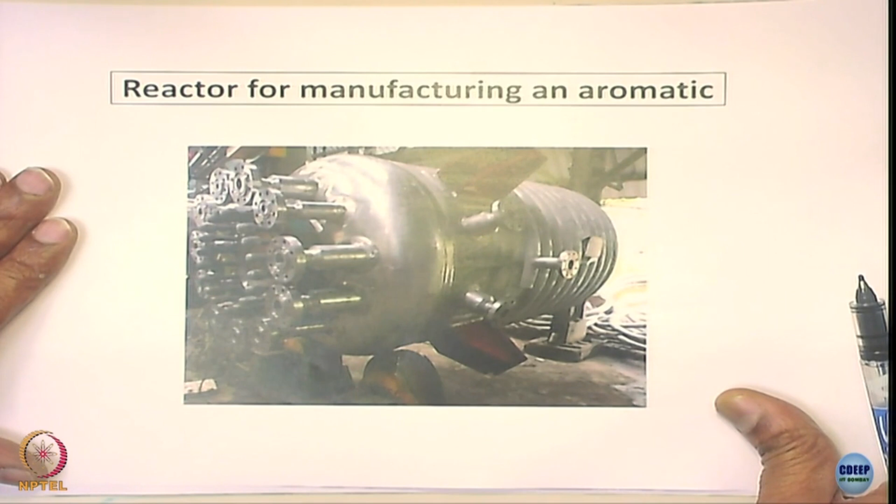And I do not think, when you have hydrogen, you really would like to take risk of that. And if I look at it, look at the inner walls of the reactor.

Normally we do NDT, right? NDT is one, very versatile NDT is dye penetrant test. Some of you are aware of it. You apply a dye on the surface and you wipe them out, and you also add another eluant to the surface, and so the dye comes to the surface, and wherever there is a crack, the dye penetrates and comes back out. So you will be able to see the subsurface cracks, even surface cracks, using the dye penetrant test.

When you take a cross section of that, you see how the cross section looks like. I hope you will be able to see very fine cracks starting from the surface and moving inward. It is a very thick vessel of 50 millimeter thickness, 304L stainless steel, and you find that it just failed in 4 months.

If you look at little bit more in detail at higher magnification, you will find the cracks are microscopic in nature, and the microscopic cracks turned into a macroscopic failure, and you guys now are reasonably familiar with metallurgy. You see that these cracks are all branching now, and some of them are called transgranular cracks. We will come back to this soon. So 4 months time and the reactor started failing.

This is a heat exchanger, this is a kind of schematic of that, and it is called an air condenser. You want to dry the air, especially when, see what happens, in industry every bit of heat is important.

You create heat, you just do not want to let it out. You take the heat out from that. Heat is essentially energy. So the air comes out of the reaction process, you need to remove the heat because it costs money, and this is the condenser, air condenser. It takes the heat and it is called a

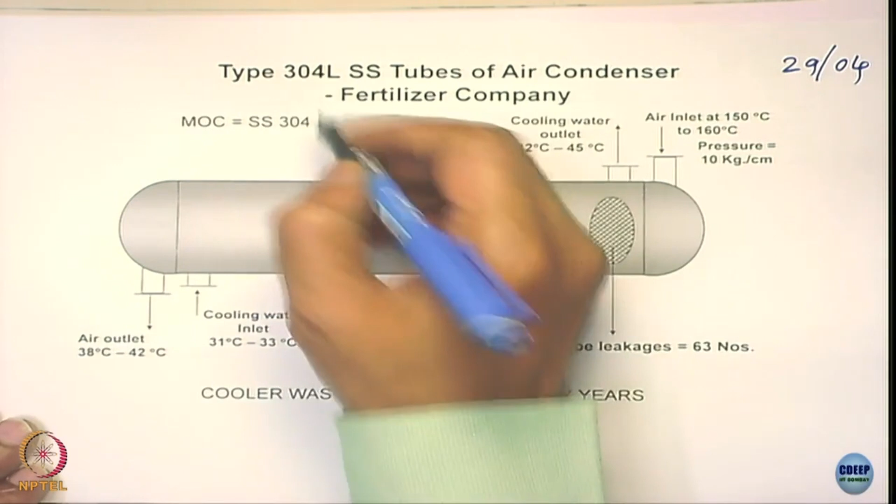cooling water system. So what you do here is that you can see there is an inlet here, it goes inside this outlet here, and it is a horizontal heat exchanger, made up of 304L stainless steel. The air inlet temperature is about 150 to 160 degrees Celsius at a pressure of

10 kg per centimeter square, and you have cooling water that enters here and comes out, air enters here and then it comes out here. It is a counter current process, that's what happens.

The material used was 304L stainless steel, it is a fertilizer company, and the cooler was in operation for 6 to 7 years, not longer. And the tubes which are inside, 63 of them started leaking. That was a problem, so they are all premature failures.

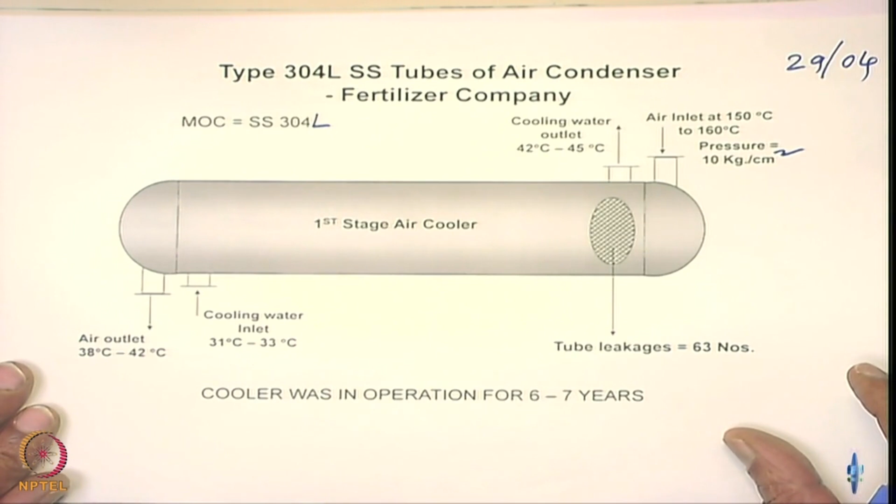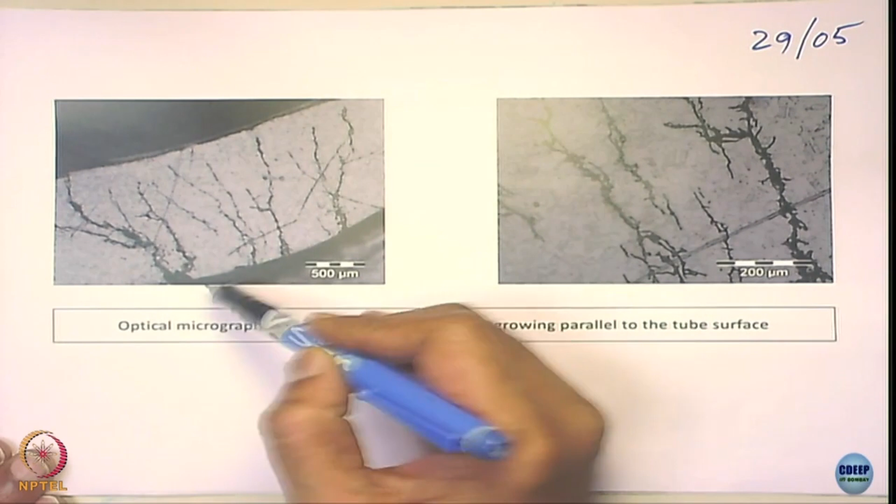You just take these tubes and see the tubes in a microscope. This is the cross section of the tube. You see here the crack started from the external side where the water went through. So wherever the surface is covered with water, you start cracking.

This is called cooling water. This is not distilled water. It is of course not pure water, not like your DM water.

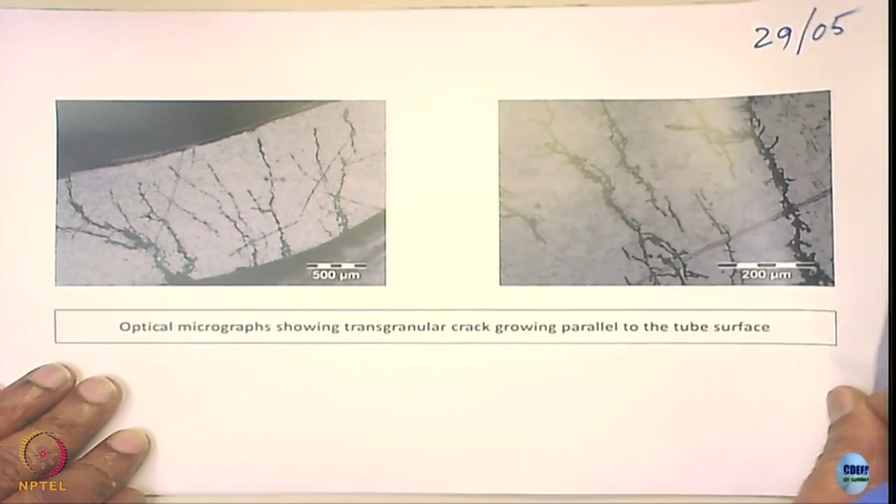Again, you see a kind of branching of cracks. This is one of the characteristics of stress corrosion cracking. If you do a tensile testing, or if mechanical loading is the cause of failure, you only see one crack. The cracks are not branching at all. The crack morphologies we will discuss shortly. And this is also some kind of transgranular cracking taking place. Look at this in a scanning electron microscope in detail.

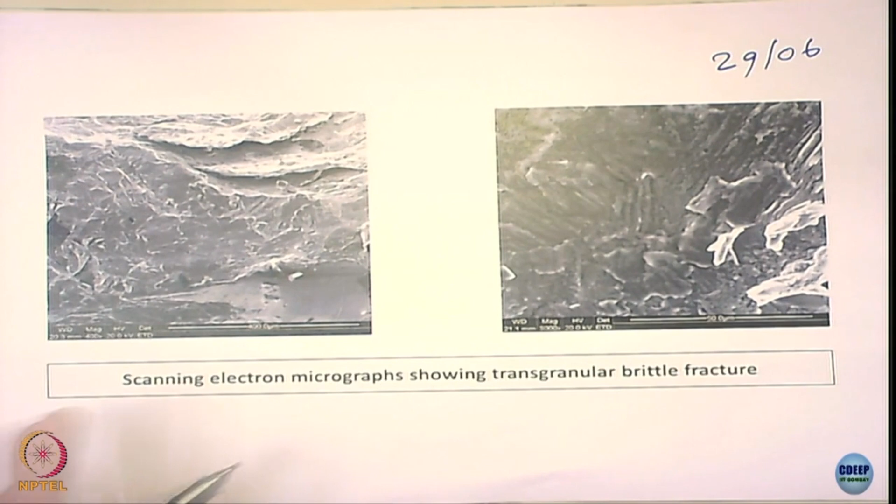See the surface, it is quite a brittle surface, right, it's a brittle surface. Those with a metallurgy background will appreciate and understand what brittle fracture is. And those who are not from a metallurgy background, I want to show how a normal fracture should look like.

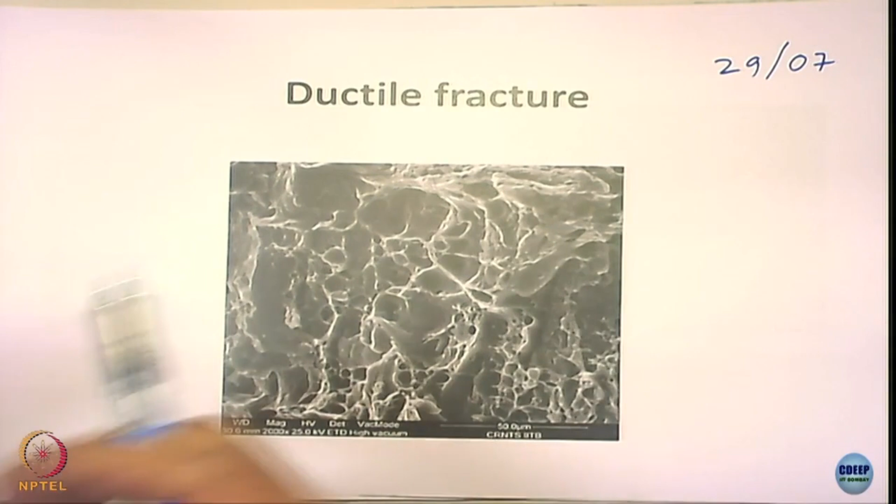Under the microscope, you see this here. This is a material that failed in air, in the absence of environment. It is a tensile failure, and hope you can see this. It is called a fibrous failure, a dimple failure and dimple fracture. You can see the fibers, the metal has nicely elongated, they just flowed nicely, right. So this is a kind of ductile fracture you see when you have simple failure in air.

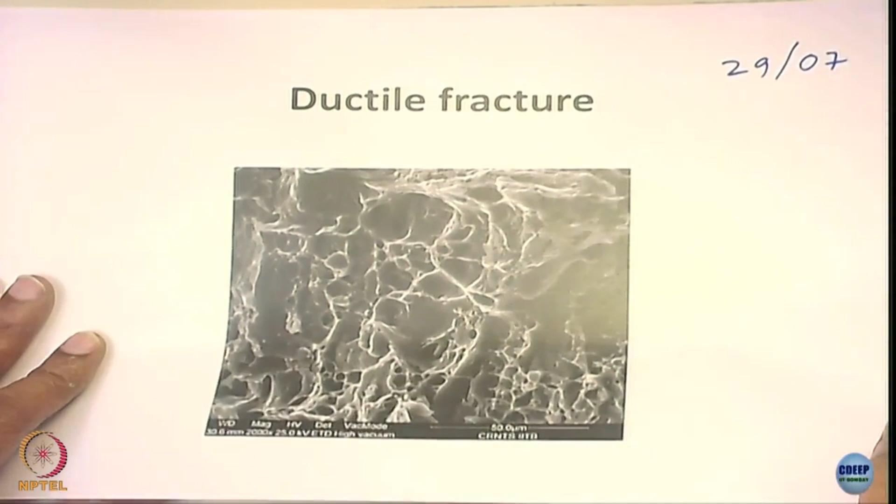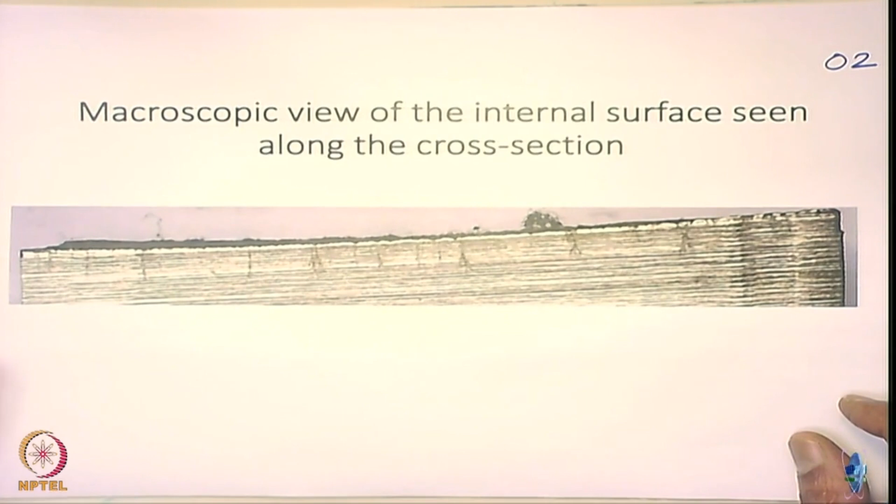The problem in stress corrosion cracking is that it can cause premature failure, and it is not going to cause too much corrosion. See here now the surface, this is the surface internally, and you do not really see much corrosion at all. I hope you were able to see this clearly. Wherever there is a crack, and subsequent places, you are not seeing any corrosion. So visually they are not undergoing severe uniform corrosion at all, and so this corrosion is very localized and is called stress corrosion cracking.

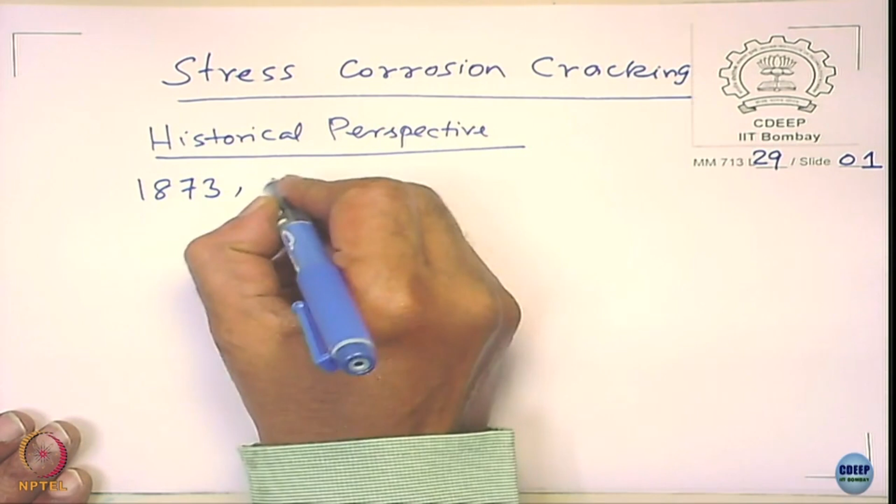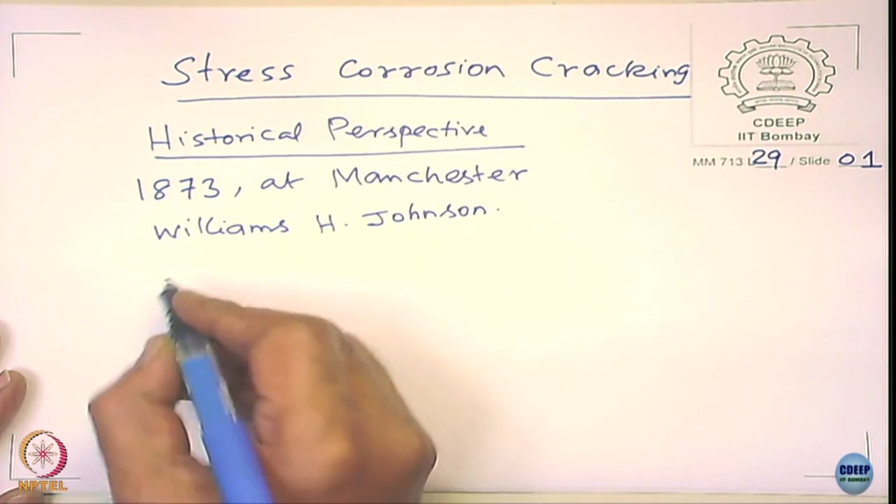Actually, in the year 1873 at Manchester, a guy called Williams H. Johnson did a very interesting, curious experiment. What he did was he took steel, and then he dipped it in hydrochloric acid, and also in sulfuric acid, both the acids. He just dipped it, and then he carried out a tensile test. He found ductility reduced significantly.

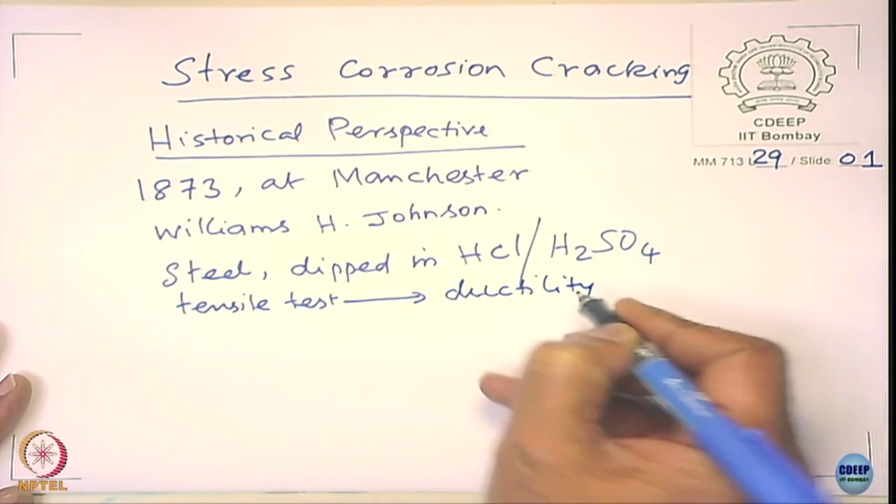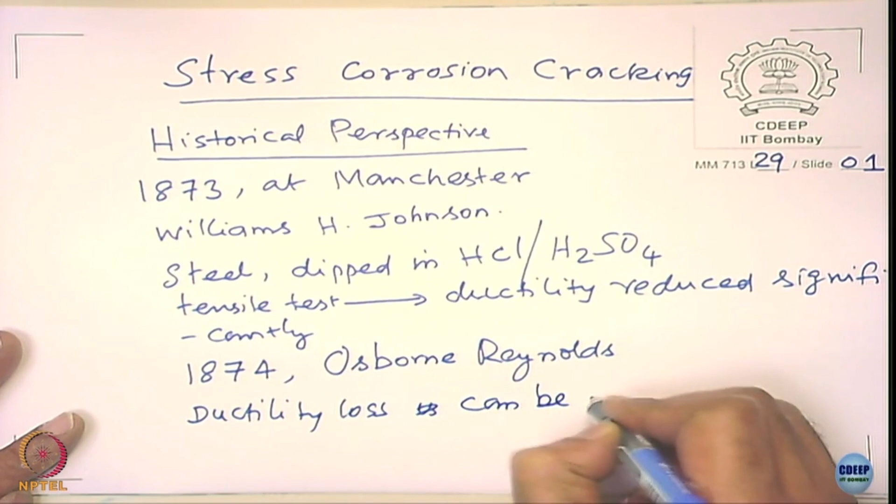In the year 1874, another interesting person, Osborne Reynolds, did another interesting experiment. He found that ductility loss can be reversible. You expose it to the environment and do tensile testing, and you see there is a loss in ductility, but if you just leave it for quite some time in air, he says that if you do a test after a few months, a major part of the ductility loss can be recovered. That was a very interesting experiment that was done.

Now subsequently, in the year 1886, the guy called Roberts-Austen took 22 karat gold and drew it into a wire. Then he exposed it to ferric chloride. The wire got cracked. Probably this is the first such observation which talks about so-called stress corrosion cracking.

The earlier observations pertain to hydrogen damage, hydrogen embrittlement, which we will talk about later. So these were all academic experiments, more academic, and the importance of such loss in mechanical properties -- you see what is here, there is a loss in ductility taking place -- they did not realize it then; they started realizing it in the early 20th century.

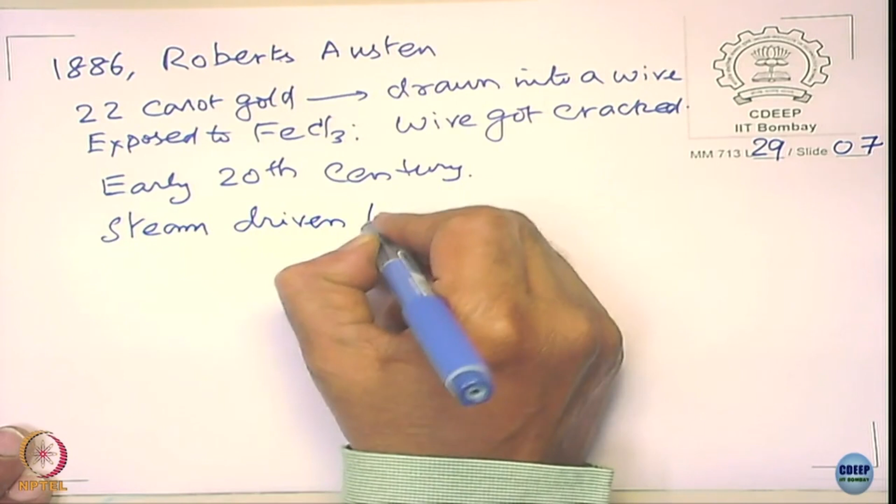There was a time when the industrial revolution was taking place, right? A lot of technologies were developed, and it so happened the invention of steam driven locomotives -- the steam driven locomotives first saw the problem of stress corrosion cracking, how severe it can be. Now it is simple: water and you generate steam, and that is used to drive the locomotives. Now the same steam is used to generate electric power, right? Now people have used electric power.

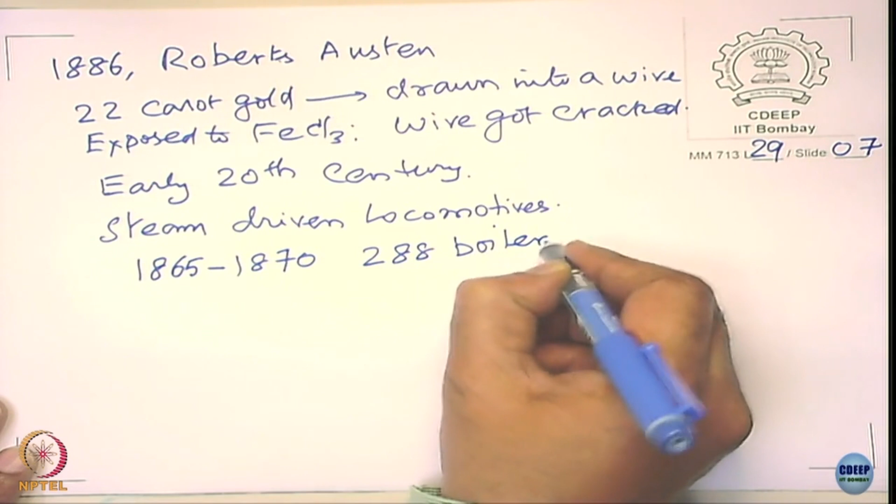Now this is a problem, because this is very mind-boggling: from 1865 to 1870, 288 boilers exploded in UK, and in 1867 to 1868, we had 441 boilers exploded in USA.

It was really kind of... you see the consequence of an explosion, right? The pressure vessel actually, and the steam at that temperature and pressure, caused a lot of casualties. How did it happen?

The steam boilers were made up of steel, and they were fabricated using rivets. You put a sheet, then a rivet, and then you cold compress it. There will be more stresses, lots of residual stresses in the system.

And when you use water for the boilers, the pH is increased, otherwise the steel will corrode. The pH used to be around 10 or so. When you boil the water and take the steam out, what happens to whatever remains in the boiler? How do you make the pH of the water higher? You add sodium hydroxide to increase the pH to let's say 10, and you boil and evaporate.

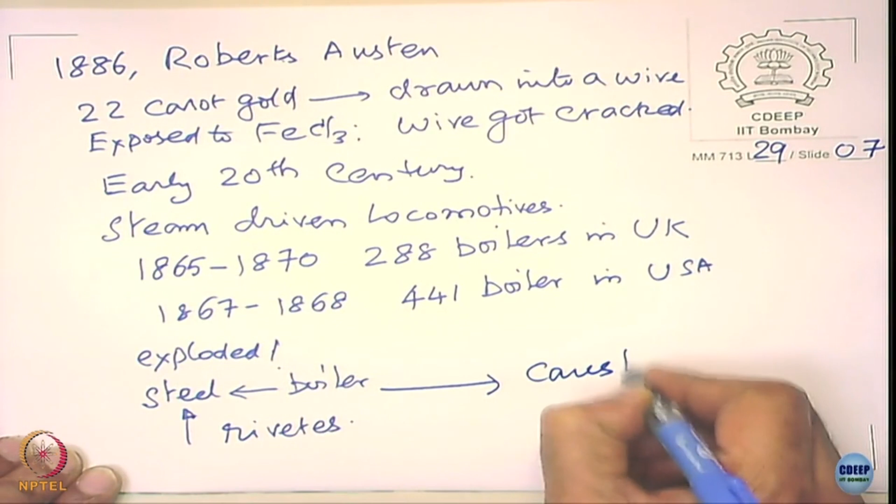With time, the sodium hydroxide concentration increases and leads to cracking. So the name emerged, caustic embrittlement. We now know it is a simple mechanism of stress corrosion cracking, but those days they called it caustic embrittlement because wherever the caustic accumulated... see, when you have a sheet joined like this and you put a rivet here, in this gap there will be accumulation of sodium hydroxide, which starts giving rise to cracks.

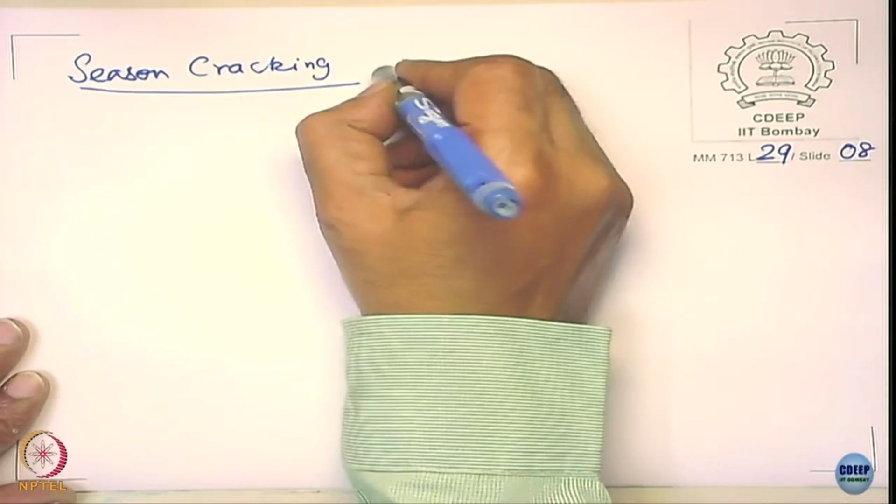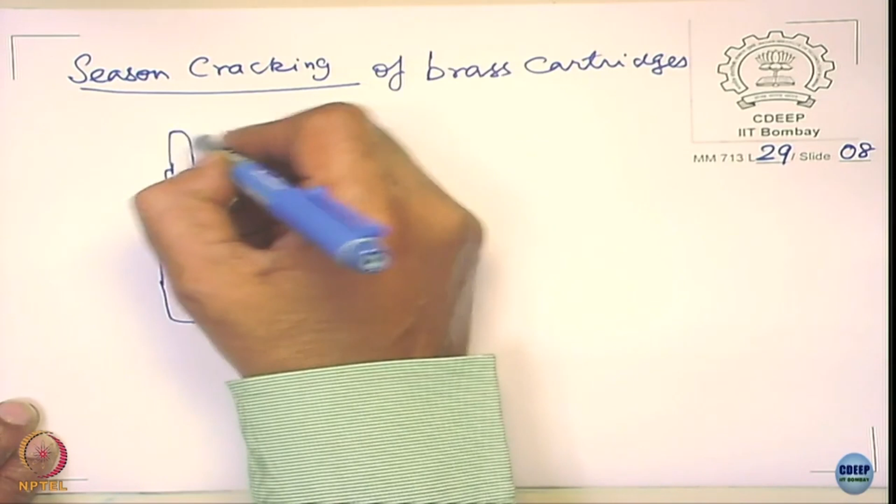Historically, there is one more incident that also brought the attention of people: season cracking of brass cartridges. It's a bullet, and you mount it, crimping here. This part is hard, maybe steel or something like that, and this is made up of brass. What happened was the cartridges started cracking during the winter time.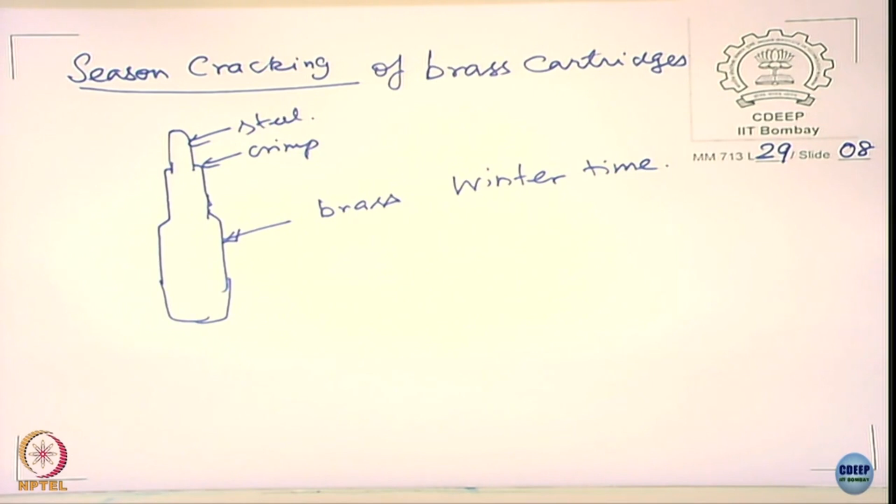This was traced to India first, because the British found that these cartridges failed during winter and monsoon time. During winter and monsoon time, what happens to organics? Suppose you have organics, they decompose and generate ammonia. The ammonia causes cracking of brasses.

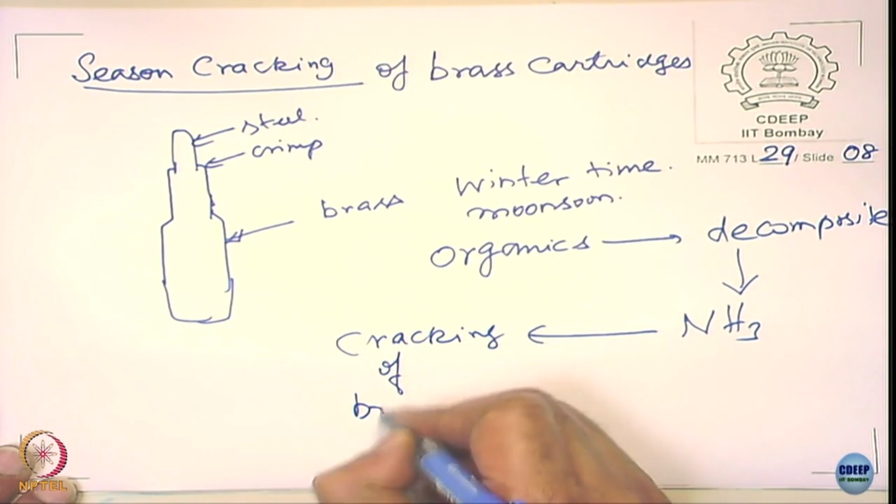So these are the names given to stress corrosion cracking because they are associated with certain events, but they all in fact come under stress corrosion cracking of metals. Why should you worry about stress corrosion cracking? Why bother about it?

We have, I think, some mechanical engineers here with that background. I give a material and ask you to use it to design some structure, maybe a pipeline or a foot-over bridge, whatever. So what input parameters do you take to design the structures?

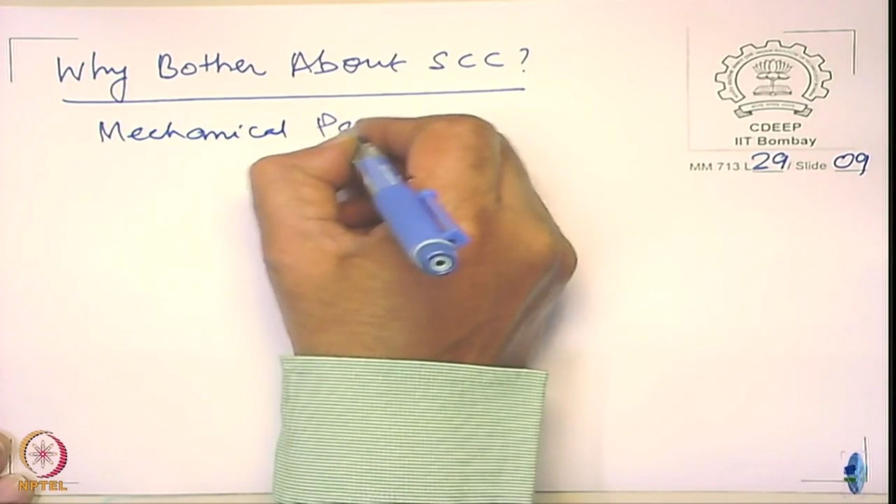These parameters - of course you can also look at the toughness, the K1C value. So you look at the yield strength of the material, ultimate tensile strength, the elongation, and the K1C value, which is called toughness. These are the mechanical parameters of interest to design a structure.

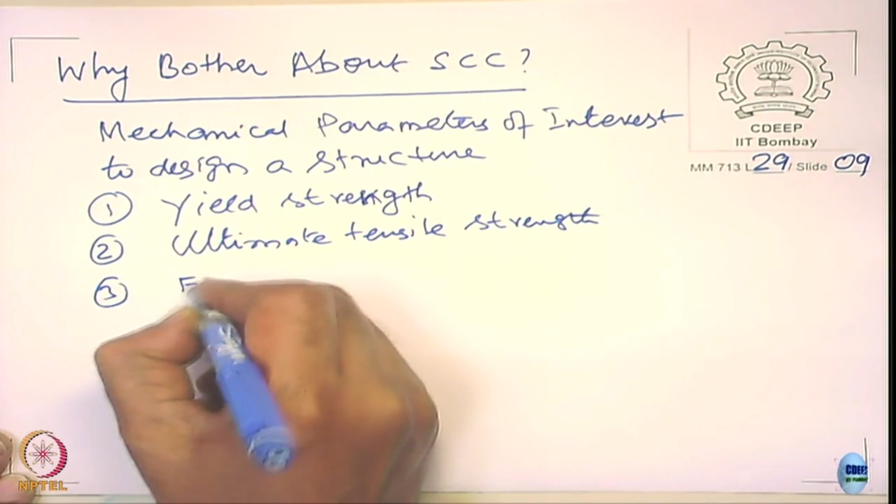One could be yield strength, two ultimate tensile strength, three the elongation to failure, four the fracture toughness.

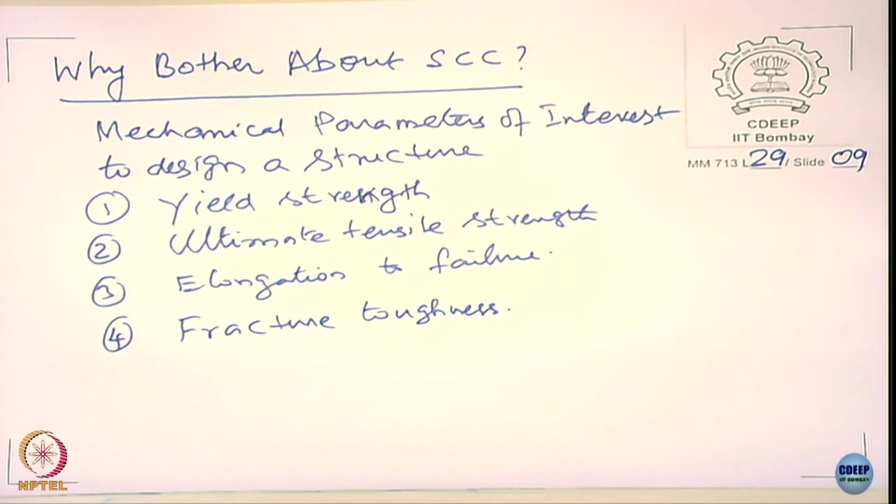If you design a structure wherein the load does not cross the yield strength of the material - suppose I use a steel, and carbon steel may have a yield strength of maybe 200 or 250 megapascal, ultimate tensile strength maybe about 400 megapascal, and elongation around 18%, it's a range of things we have. So suppose I design a structure such that the load does not lead to a stress level beyond the yield strength of the steel, what happens? It will endure forever, because it is within the elastic limit, it does not undergo any plastic deformation - it is within the elastic limit.

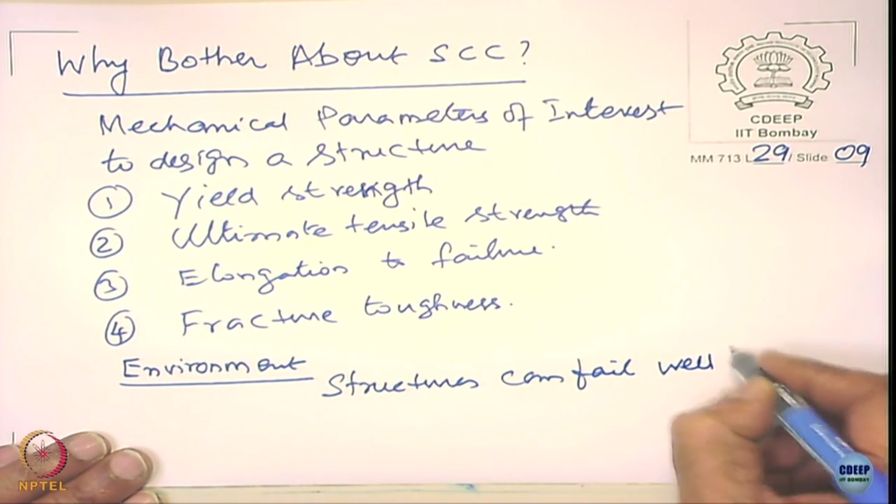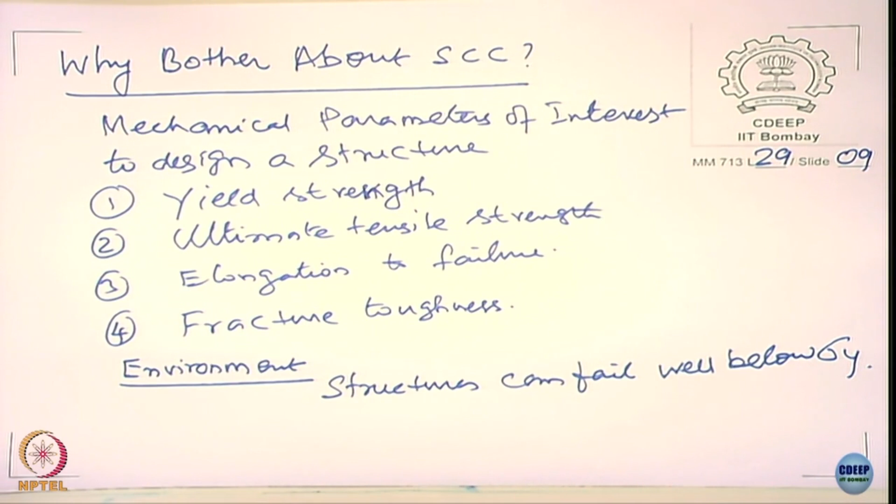So it is supposed to endure, or wrong. Suppose you have an environment coming in contact with this, structures can fail well below yield strength. It can happen even at about 25%, 30% of yield strength. Not all cases, I am saying there are cases where the metal can fail at about 25%, 20% of the yield strength.

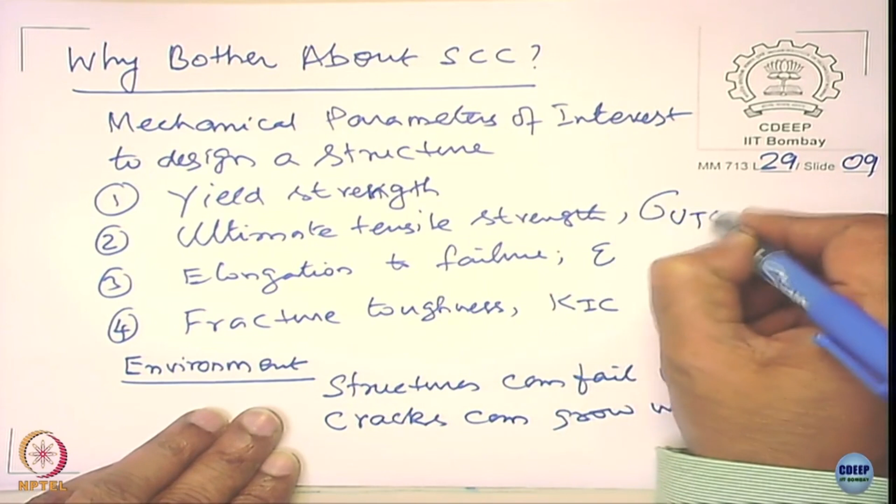Now, cracks can grow well below K1C, fracture toughness is K1C, right, elongation is given as epsilon, sigma UTS and sigma yield strength.

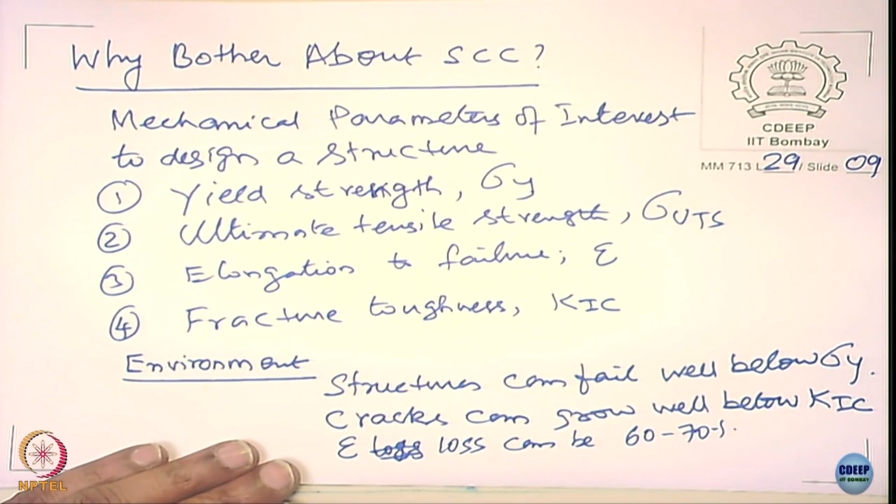That is because the elongation loss can be 60 to 70%. I can lose my elongation 60 to 70%. So what does it mean? If I lose that elongation, that is what is going to be, elongation means what? Ductility, right? The ability of the metal to manage any distortion in the structures that could happen during the load bearing things, isn't it? It could happen, right? So if there are going to be a distortion and if the metal is not plastically deforming, then what happens? Like a glass, you can just simply crack. So you can lead to a brittle.

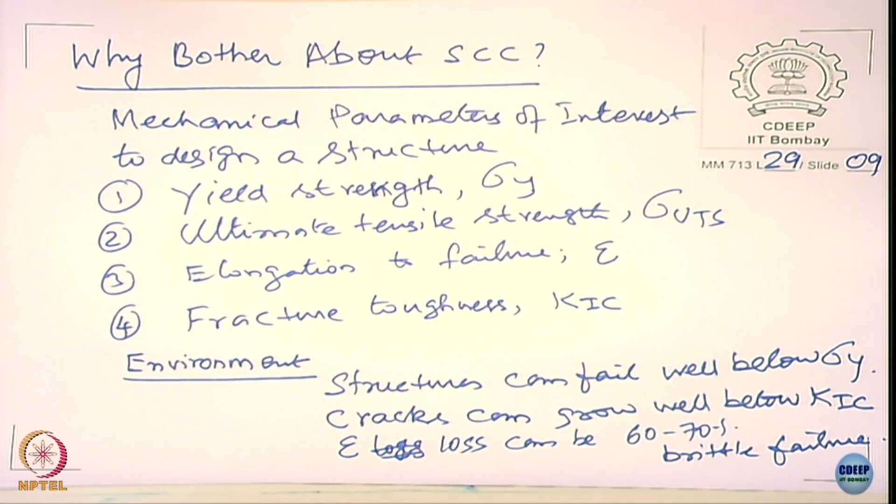That only talks about safety, right? The safety here depends upon how ductile, how tough they are actually. So if it is going to be brittle, then safety becomes a casualty. So stress corrosion cracking is a problem, and for the structures where you expect it could suffer, okay, it could suffer through that particular failures.

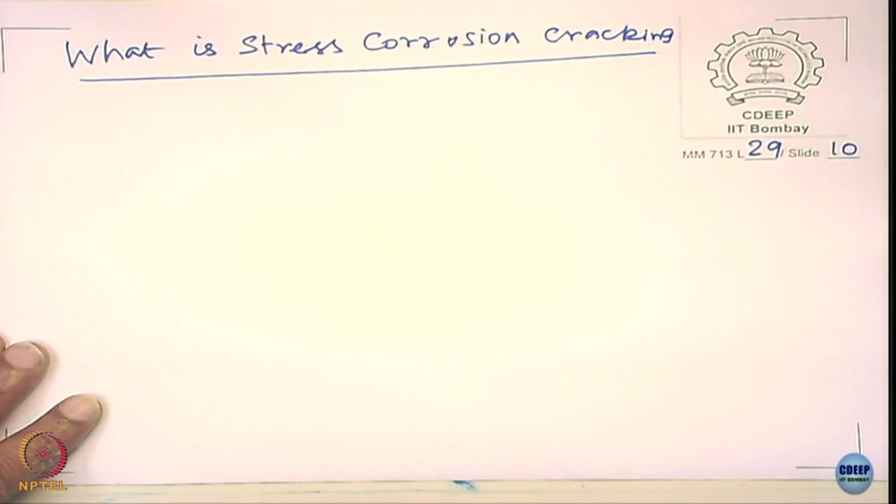Look at what is stress corrosion cracking. It is conjoint action of tensile stress and corrosive environment.

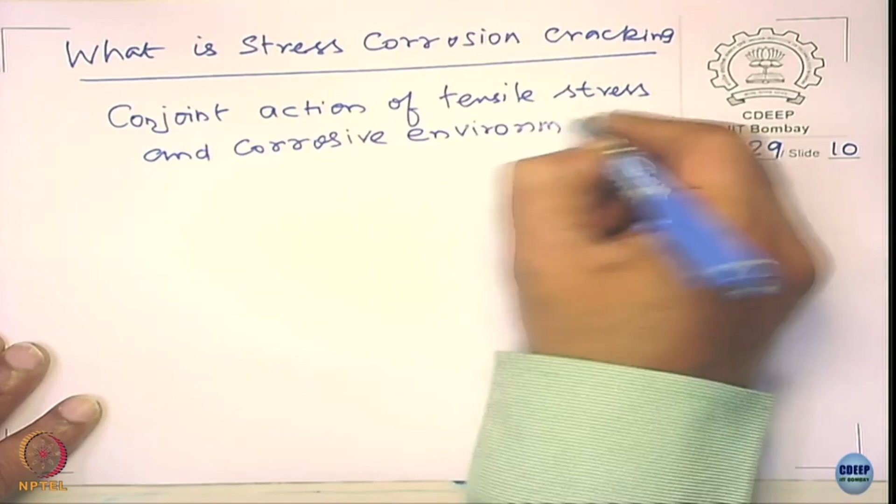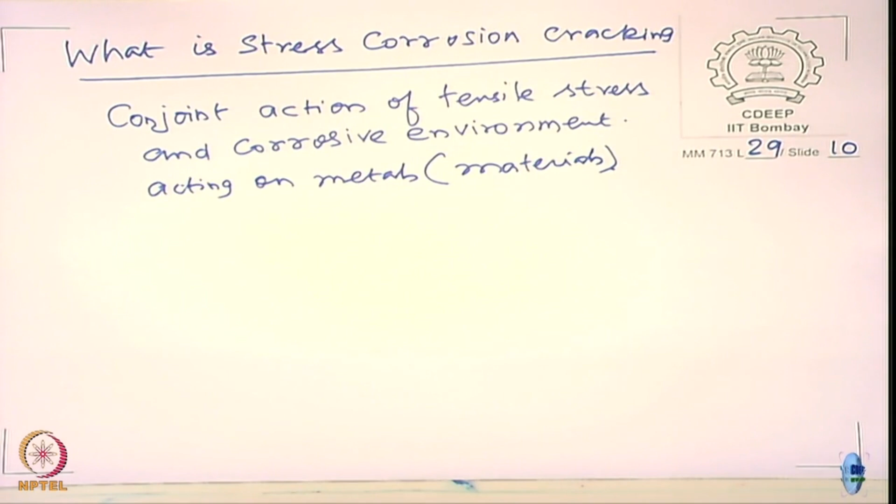Acting on metals, can also happen in materials also. It can happen even in glasses, it could happen in polymers, but most of the engineering materials we deal with, and especially this course we discuss more on metals, okay. But it is just not confined only to metals and alloys. Materials can happen, ceramics can fail, glasses can fail, polymers also can undergo stress corrosion cracking because the environment can interact with them.

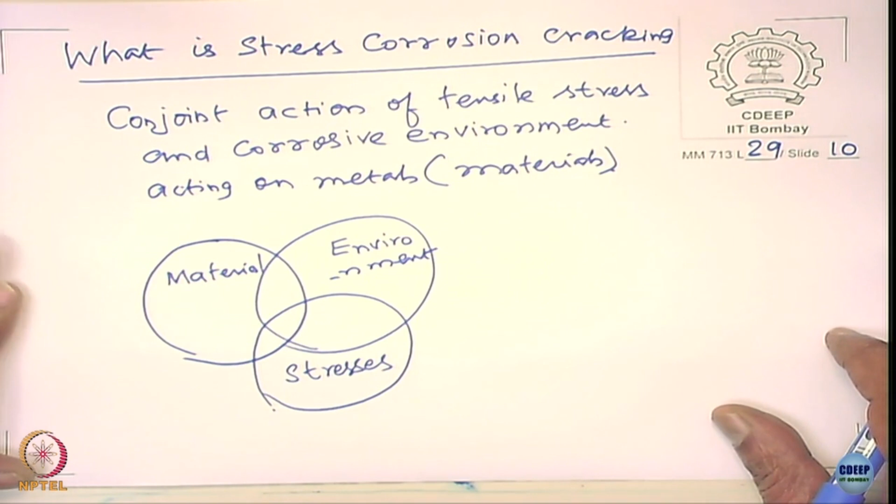So you have three players here. One is material, other is the environment, the third is the stresses. When I mean stresses, I mean here the tensile stresses, okay. It is not a fatigue, it is not a fatigue stress, not a shear, we are not talking about torsion and we are not talking about compression, all these kind of things.

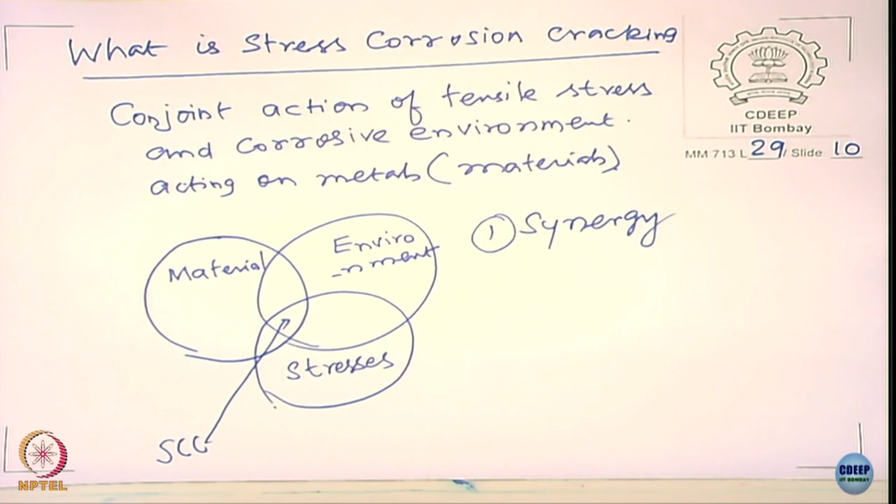And all this lead to SCC. So it is a synergy taking place. Please look at it as a synergy, right? It's not a cumulative, that corrosion means this much loss in weight. In air, the metal undergo this much of tensile strength. It's not additive, it's a synergy, and also not much loss in weight due to corrosion.

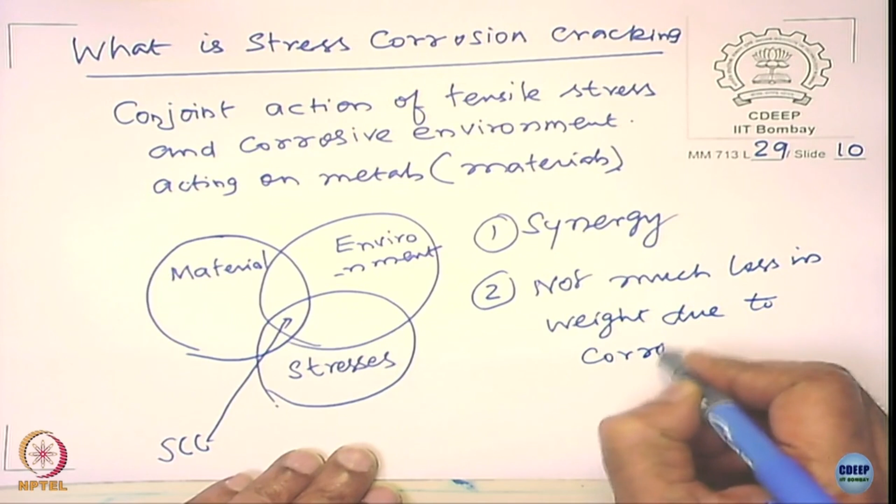Now this is a Venn diagram, we call it a Venn diagram. Now you look at this, there are three players here, the material, the environment, I mean the chemical environment here. I suppose we define the beginning of the course itself, we are not talking about physical environment, we always talk about the chemical environment when it comes to corrosion, and we talk about the tensile stresses.

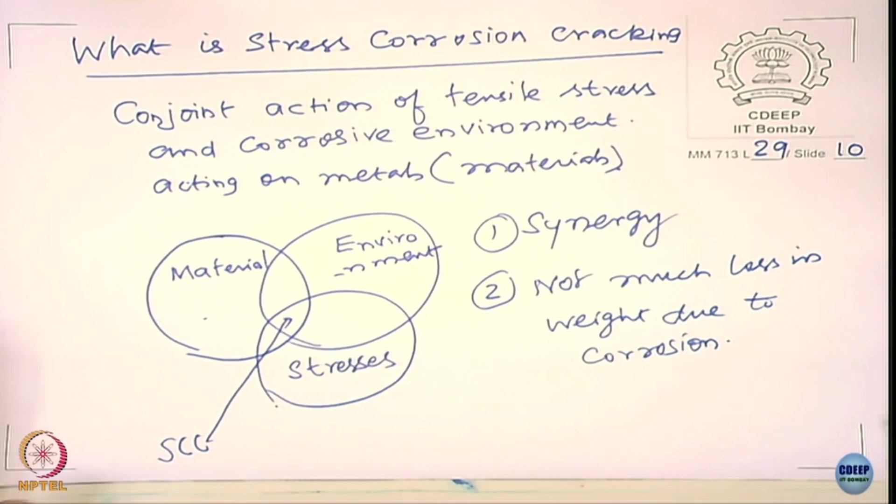So in order to understand stress corrosion cracking, we need to look at the material aspect, the environment aspect here, and we need to also address the stresses. So all three we need to be understanding in order to get a picture about stress corrosion cracking, and then to say how we can control the stress corrosion cracking. Stress corrosion cracking can be taught maybe some 10, 12, 15 lectures more actually. So we will be very brief, and at best we will take about 3 classes and try to see how we can understand stress corrosion cracking of metals and alloys.

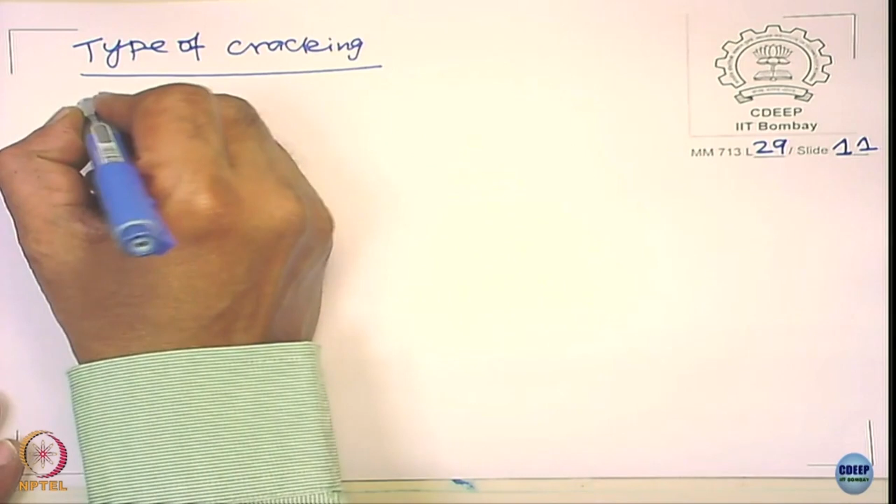Now let us go into the first aspect of the cracking. The types of cracking. Whatever be the cracking, whatever be the types of cracking, the cracking is always brittle in nature. The brittle is a very qualitative term, it is very difficult to define what brittle is, right. I do not think there can be anything which is 100% brittle, and you cannot say anything as 100% ductile kind of things. So it is a character of the material actually. What is the character here? What is meant by brittle as opposed to ductile? What do you mean by that? Let us look at it from the perspective of what happens to the metal when you deform it actually, right.

Sir, can we say that brittleness is that there will be no elongation before the crack propagation can take place? So there will be, okay, what is meant by no elongation, right? What do you mean by no elongation? Local yielding at the surface. Okay, there is no local yielding at the surface. All right, you are right. What is happening? That means there is essentially no atomic mobility taking place.

When you apply a stress, the atoms start moving, that is what you call plastic deformation.

When does the plastic deformation occur? When the stress applied is greater than the yield strength. That is where the dislocations move, the atoms move. The mobility of atoms is related to the mobility of dislocations. So only above the yield point do dislocations move, and through which the atoms move, and so there is going to be plastic deformation. The metal takes the shape that you wanted.

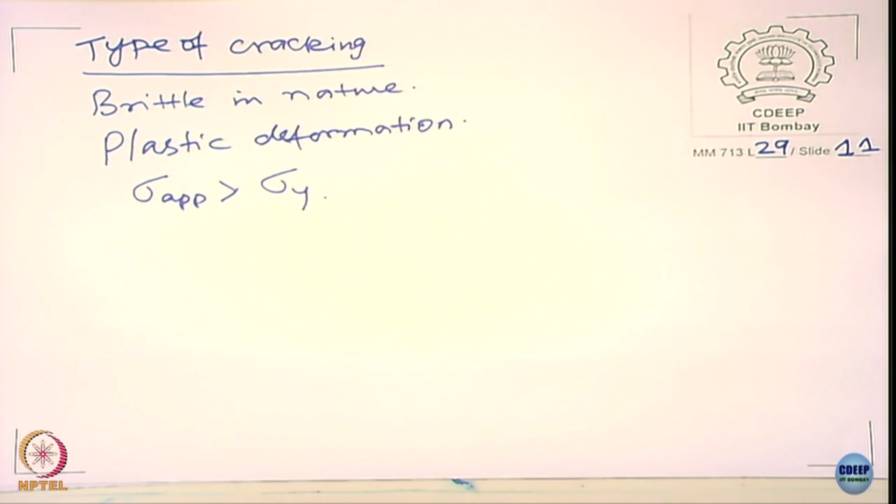In the elastic limit, there is no atomic mobility. If the metal fails in the elastic regime, then it becomes brittle. Why? Because essentially atoms do not move at all. If stress corrosion cracking in the environment facilitates crack initiation and crack growth below the yield point, then the metal will behave something like glass, because the atoms do not really move at all. Am I right or not?

So the fracture process depends upon at what stress level the metal fails. If it fails close to ultimate tensile stress, it is going to be nice, full, ductile failure. If it fails somewhere between the yield point and UTS, depending upon where it fails, the extent of ductility is going to change. It's a qualitative parameter, I don't want to discuss too much on it, but I want you to get a feel for it. That means if the metal fails below the yield point, you can get nice brittle cracks occurring in the metal, but the metal does not necessarily always fail in that manner.

Now let us look at a microscopic level, how does the crack propagate? That was a macroscopic level. At a microscopic level, how does the crack propagate?

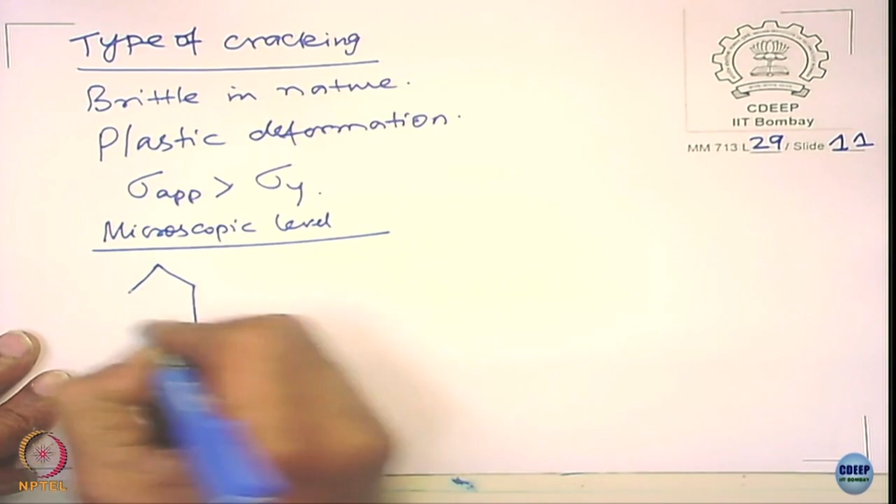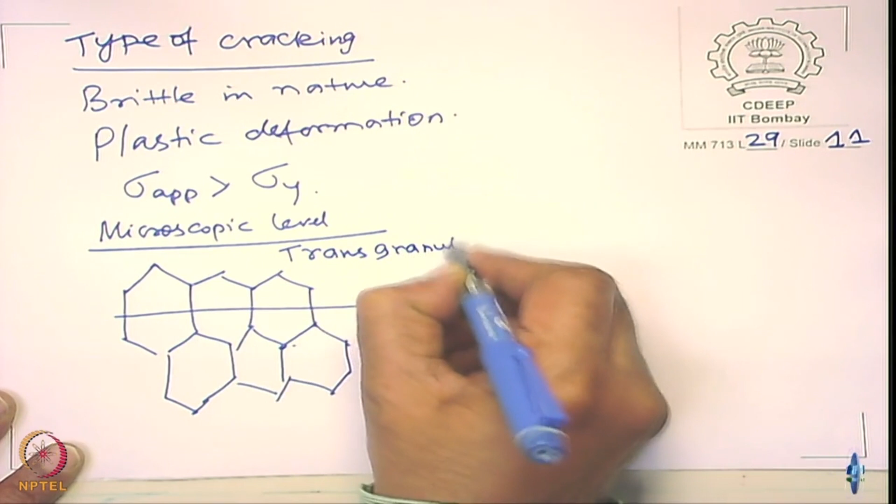We all know we deal with polycrystalline material. Now the crack can grow along this way, we call it a transgranular crack.

In fact, most of the mechanical failures in air are all transgranular cracks, but they are transgranular ductile cracks. Here you also have transgranular cracks, but these are transgranular brittle fractures. The crack also can grow...

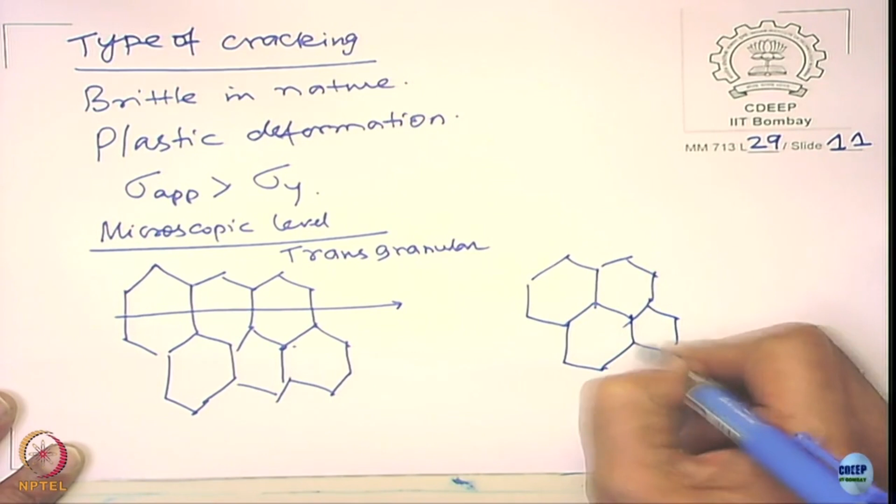It can grow along the grain boundaries, and what is this called? Intergranular cracks.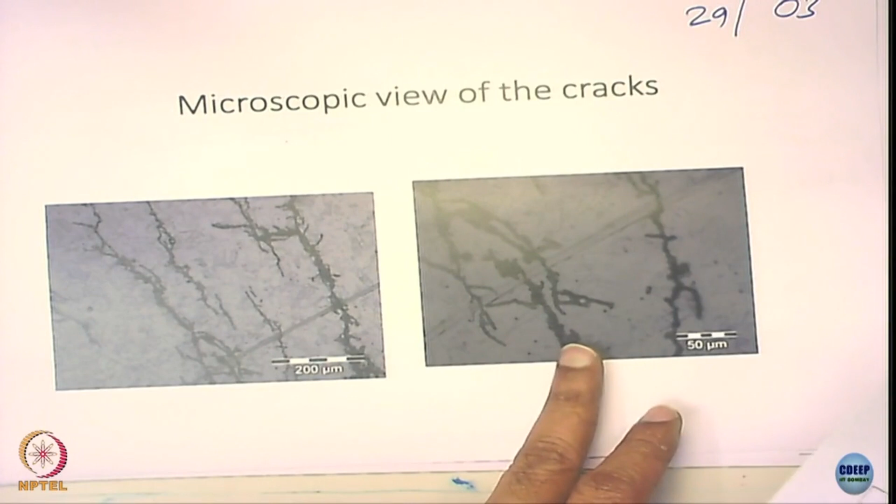You see that in the scanning microscope, please look at this, this is not the crack interface, right? You can break this open. This is a crack plane. This is the plane through which the crack is moving now.

Now look at this, this becomes totally transgranular cracking, and I hope you are able to see some grains here. There are grains here, there are grains here, and you can see this also, there is a grain here. So the crack cuts across the grains, and so they become transgranular cracks in nature.

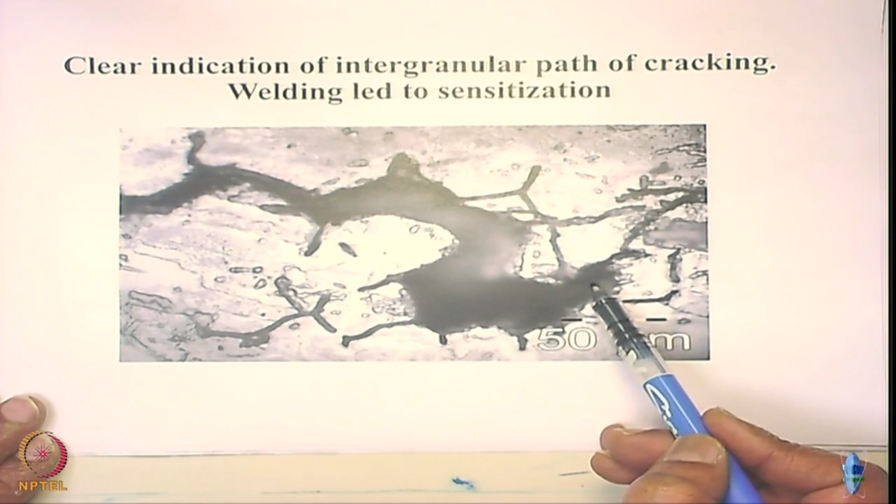Look at this, it's a clear intergranular crack. Look at the grain here, the crack grows along the grain boundary. Why? The grains have got sensitized, you can see this here. The grains got sensitized, and the crack grows along this. So this is the surface of the specimen, see that.

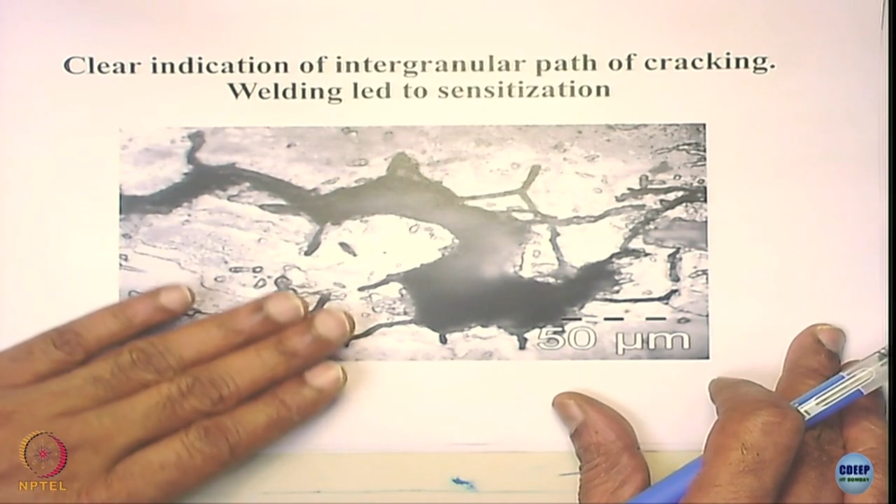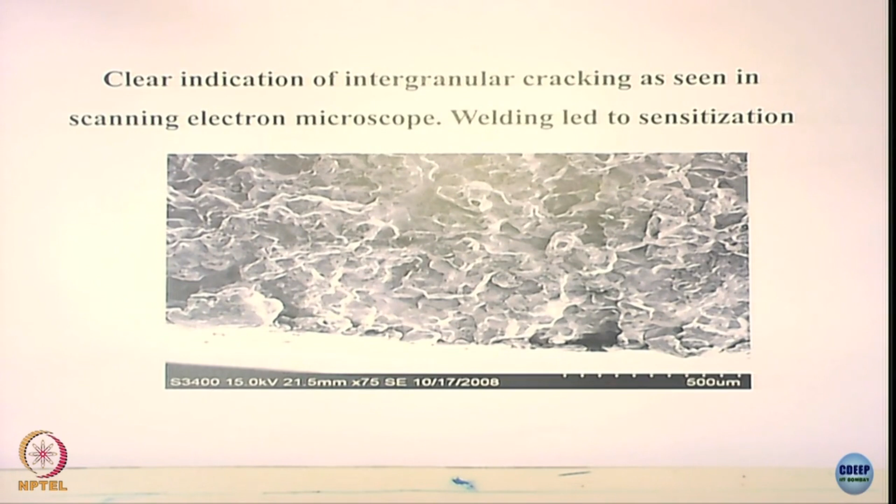If you break open this and look at the crack plane, you'll be able to see the nice grains which are not elongated, right? You can look at these, these are all grains. You see the grain facets, the clear grain facets. The grain facets mean the grains are not deformed like sugar, like sugar grains, you see that, right? So they are not deformed.

The corrosion has occurred selectively along the grain boundary and the crack starts moving along the grain boundary. So the grain boundaries are relatively electrochemically active. I use the term electrochemically active because it can be anodic, it can happen, it can even sometimes be cathodic, that happens in the hydrogen embrittlement case. But if the preferential dissolution takes place here, the grains are not deformed and you see a huge amount of intergranular cracking taking place.

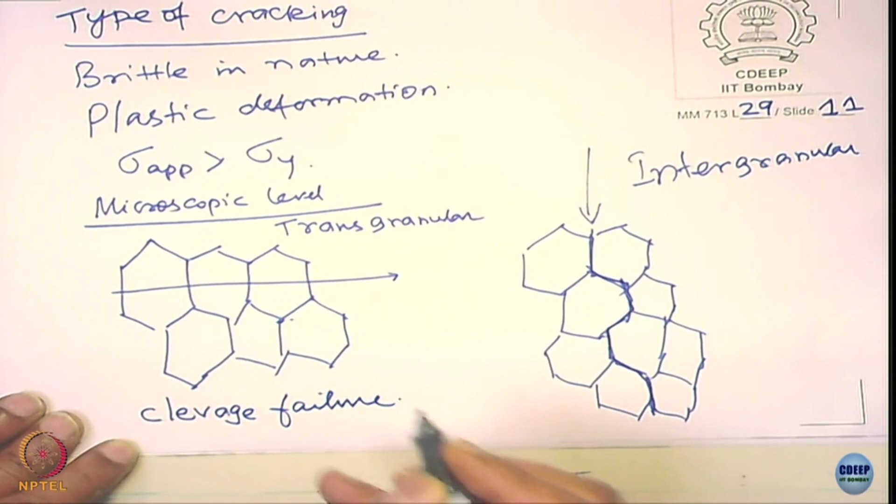This is one way of looking at it. There are cases where it is not necessarily 100% intergranular or 100% transgranular, it could be a mixed kind of failure, right. So this is what really happens. In all these cases the failure is called cleavage failure. I hope you've heard of the term cleavage failure. What is cleavage failure? Anybody has an idea?

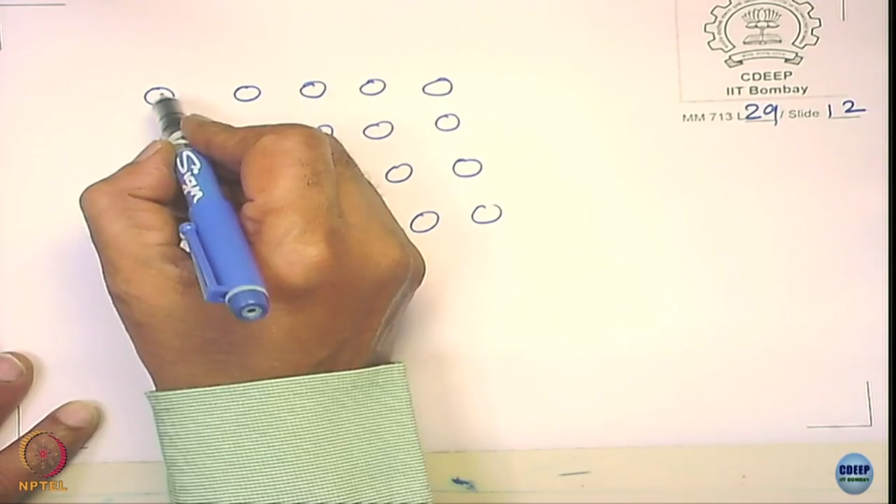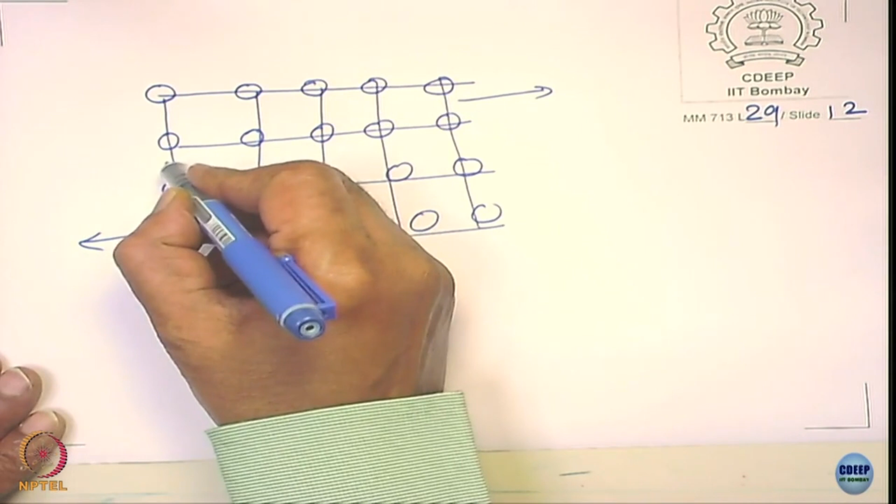The lattice that I have, when you apply force, atoms start moving when you have dislocations. If you have no dislocations, of course it's difficult for that to move. Now when you pull it, assume that I use a scissor, I cut this bond, I cut this bond, I cut this bond. If I cut this bond, what happens now? This piece becomes separate, that means atoms are intact, their positions are not changed because these bonds are weakened now. So cleavage fracture means essentially the bond between the atoms is broken well before the atoms could displace from their positions.

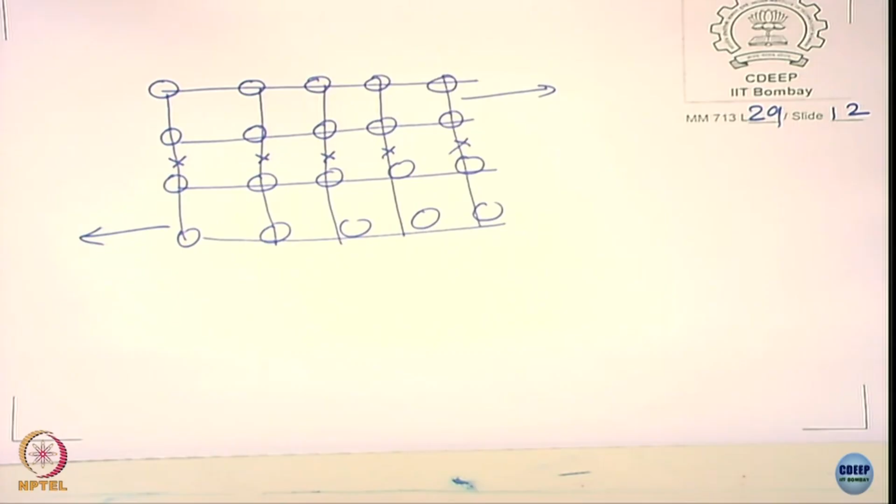So this is what we call cleavage fractures, that's what happens in the grain boundaries. You have one grain, another grain, in between the atoms just cleave out, that can happen. That happens, but of course here corrosion can lead to that, but you also have intergranular cracking taking place in air also. You talk about temper embrittlement, all that stuff too. So they are all cleavage fractures, the bonds between the atoms have poor cohesive strength. It can happen and it can lead to this kind of failure.

So it is very important to understand the nature of cracking in stress corrosion cracking failures, otherwise you will get misled. You may consider it as, you know, a normal tensile failure. So cracking mode is one of the signatures of stress corrosion cracking. If you do not identify that, then you will not identify the problem. Let me just spend a minute and then I think I will close today's discussion.

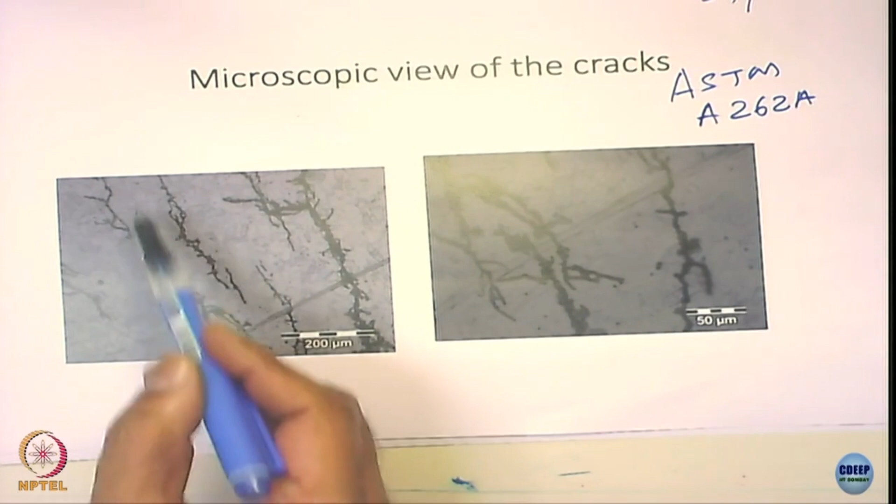If you find a crack like this, both of these, what is called, you already studied sensitization, right? It is a stainless steel, they carried out an ASTM A262A test. You do not see any sensitization here. You see the sensitization taking place here, right? Here also you have ASTM A262A test, right? But there is also sensitization taking place.

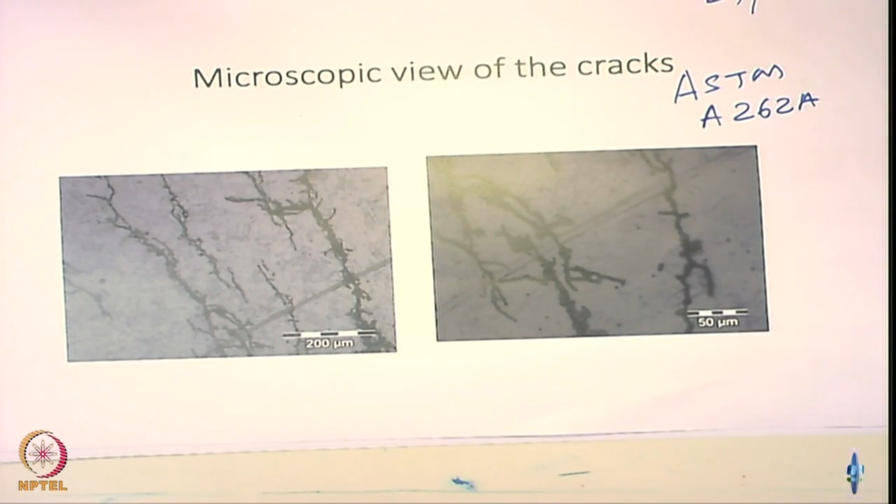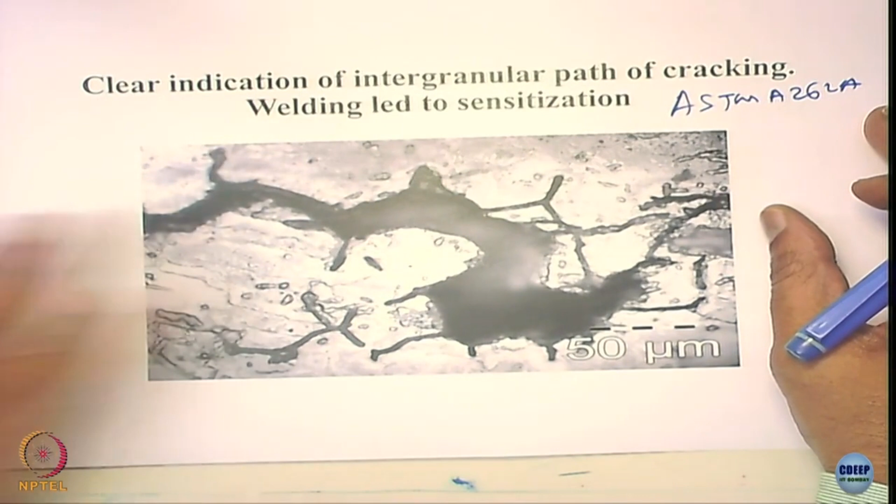So the alloy failed by brittle fracture in case 1 and case 2, but the reasons for failure are different, right? The reason for failure in this case is improperly solution annealed or improperly welded, whatever kind of thing. Here everything looks okay, but the alloy is not good enough for the environment. So the way you diagnose the problem is different. In this case you say the metallurgy is not adequate for the severity of the environment, you need to change the alloy. Here the primary cause seems to be sensitization, which is related to carbon content, welding, improper solution treatment, so many factors are going to be there. So you need to understand how the cracking takes place before we can come to a conclusion about the root cause of the problem in stress corrosion cracking.

So we have seen now the crack morphologies, the nature of cracking, and we will end our discussion today.